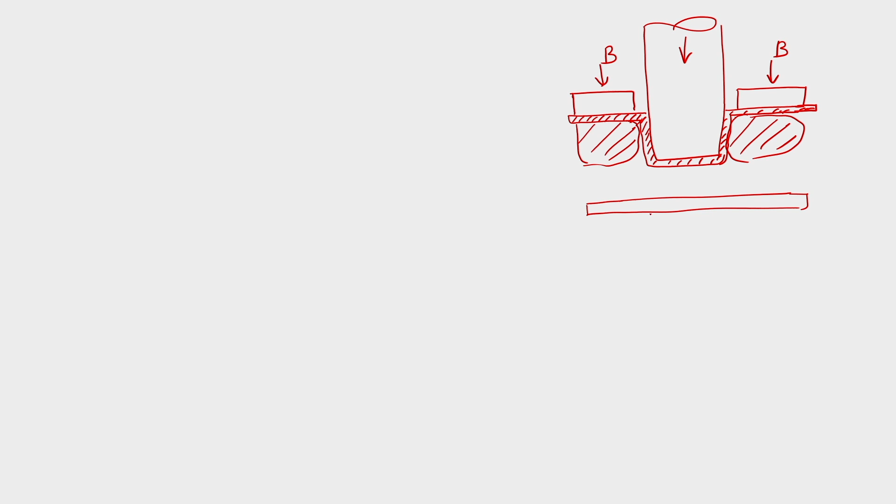These are the two things. We have this tension here, maybe this is T phi we can say. This is one part. At this initial part, the drawing of an annulus part towards the inside will be moving along this direction on both sides, and friction also comes into picture.

Whereas the second part is the stretching of the sheet over a circular path, the circumferential part around the punch. So these are the two things, and these two operations are connected to the cylindrical cup wall. The cup wall is not deforming, but it transmits the forces between both regions, the annular part drawing inwards and the stretching of the sheet over the circular path.

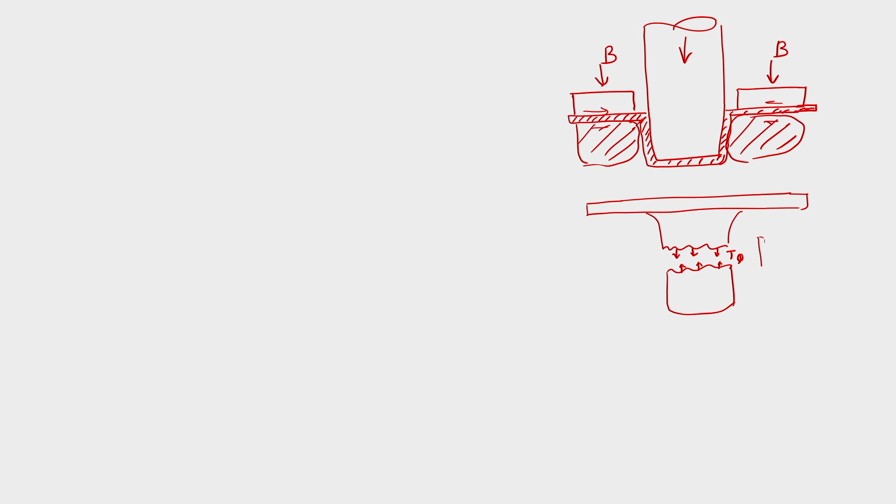If you consider the drawing of the flange part, where it is drawing inwards, we can say drawing of the flange. Consider that the flange part is circular, and we are only considering that part, where the flange radius is r0, the initial radius, and this is ri, the initial internal radius of the flange part. At any arbitrary point, we take r value.

If you look at these conditions, there are stresses present, inside stresses are also there. If you look at the flange of the shell, any part of that can be considered as an annulus part.

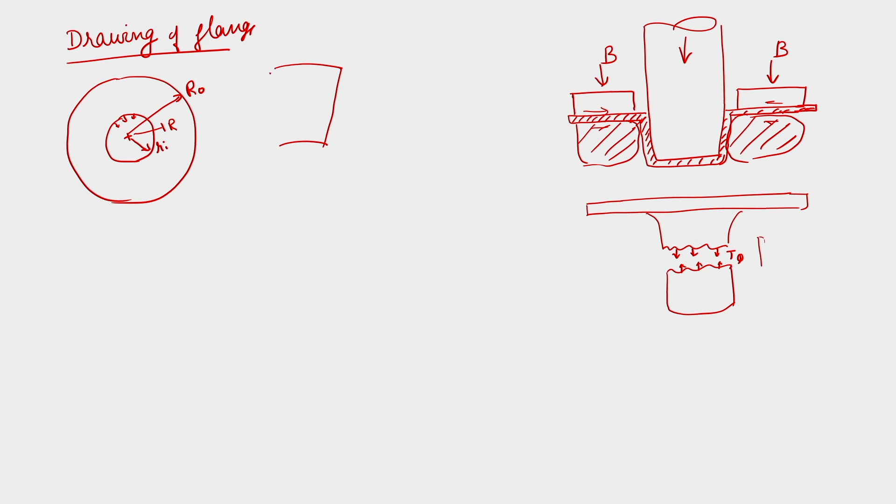The stress on the element of radius r, if you take an element on this flange part at radius r, you will find the stresses acting: sigma r plus d sigma r, the radial stresses, and towards this direction it is sigma r. Then you have the hoop stress, sigma theta, and this is your dr radius. This will be your r, and this will be your d theta.

This is the element, and if you look at the thickness, you will find it is T plus dt, and here you are getting T. These are the stresses on the element of radius which is taking place.

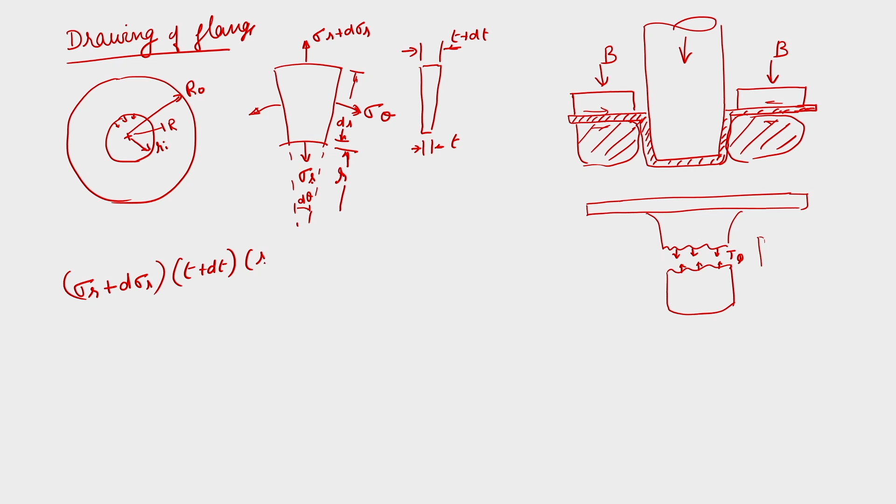The equilibrium equation when you write for this particular condition for this element: we write sigma r plus d sigma r, plus into t plus dt, into r plus dr, into d theta, is equal to sigma r t into r d theta plus sigma theta t dr d theta.

You expand and eliminate the higher order terms, and manipulating it mathematically, rearranging it, this reduces to the form: d sigma r by dr plus sigma r by r into dt by dr, minus sigma theta minus sigma r by r, is equal to 0, equation number 1. So it reduces into this differential equation.

Now when you look at this, if you take these 2-3 cases, say the radius along a line, you can find out what are the forces at A, at the extreme end of the flange, then at B, which is intermediate between the inner radius and the outer radius, and then at C.

At these points, if you look at the stresses, at the outer edge of the flange, since it is a free surface, your radial component of stress sigma r is equal to 0. So at the outer surface, the free surface at A, it is a uniaxial compression stress in which sigma theta is equal to the uniaxial flow stress of the material.

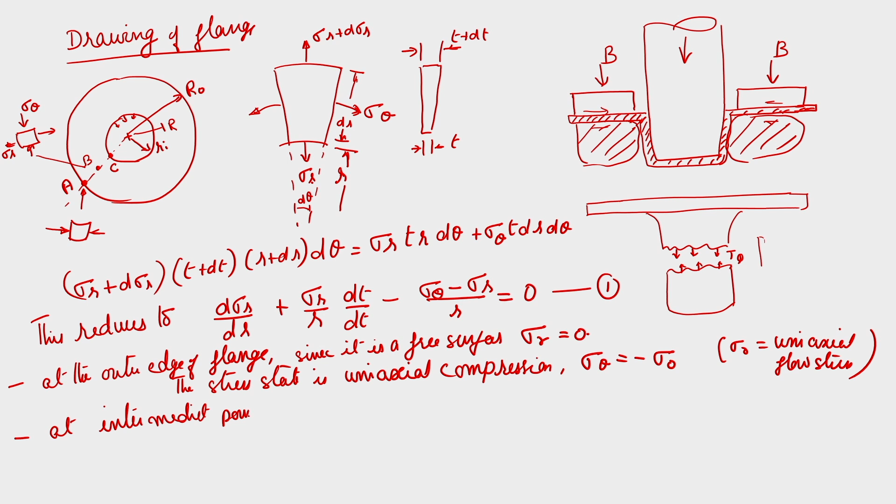So at this point, the situation is: sigma r is tensile, and sigma theta will be compressive in nature. So at B, at this intermediate point, you will see that sigma r is equal and opposite to the hoop stress sigma theta, where sigma theta is the hoop stress and sigma r is the radial stress.

And at the inner edge, that is point C, you will find that the radial stress is the maximum. So the radial stress keeps on increasing from the outer periphery to the inner radius Ri of this cup.

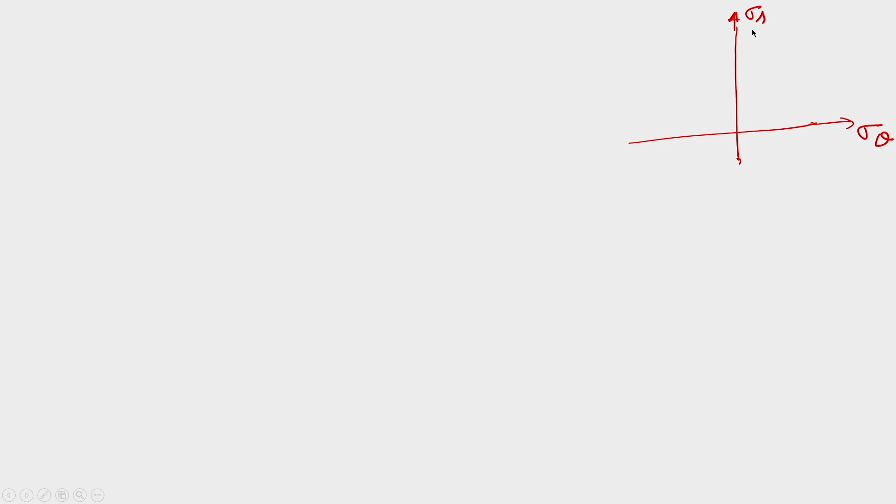Now if you look at the strain diagram at these three points, assuming Tresca criteria, it will be like this. Here you have sigma theta, and here the radial stress sigma r, that is sigma 1, sigma 2. Assume it is something like this, where this is point A, and the strain at point A is epsilon A, because when it is drawn inwards there is thickening taking place.

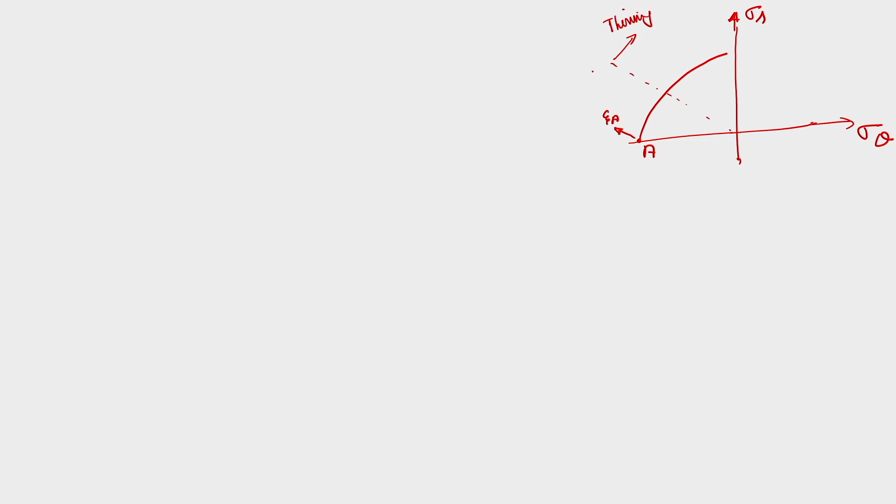If you look at this point where alpha is equal to -1 and beta is equal to -1, here it is thinning, if you refer to our earlier diagram, and this is thickening. So here you get point B, suppose at some intermediate point these two will be there. This is the condition, and here may be your epsilon B, and here it may be your epsilon C at some point, and maybe if you just take this as your sigma 0.

This is the instantaneous flow stress of the material. So this is your sigma C, epsilon C, not sigma C.

So at the outer edge, the blank will thicken as it deforms, because it is in this region. If you refer to our strain diagram discussed earlier, beyond this point towards the second quadrant, between region A to B, the material will be thickening, whereas from B to C, the material will be thinning. When it reaches C, there will be maximum thinning.

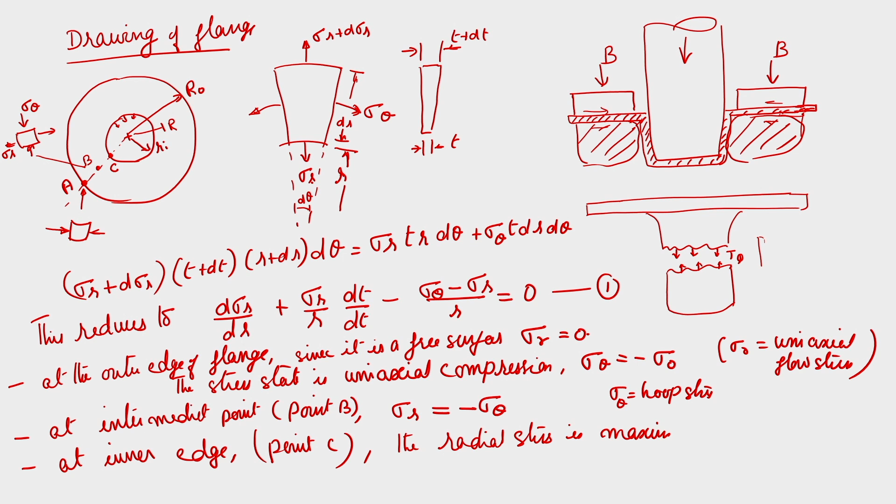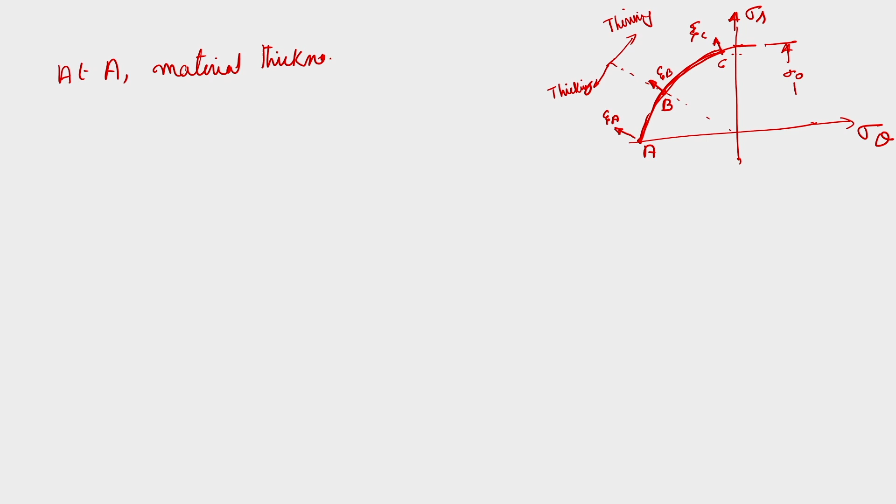So at point C, the inner edge, the sheet will thin down, and that will be the weakest point. The overall effect is that if it is thickening at one edge and thinning at the other, the overall area of the flange remains almost constant, which is a very good approximation. So, at A the material thickens, at B we can assume no variation in thickness.

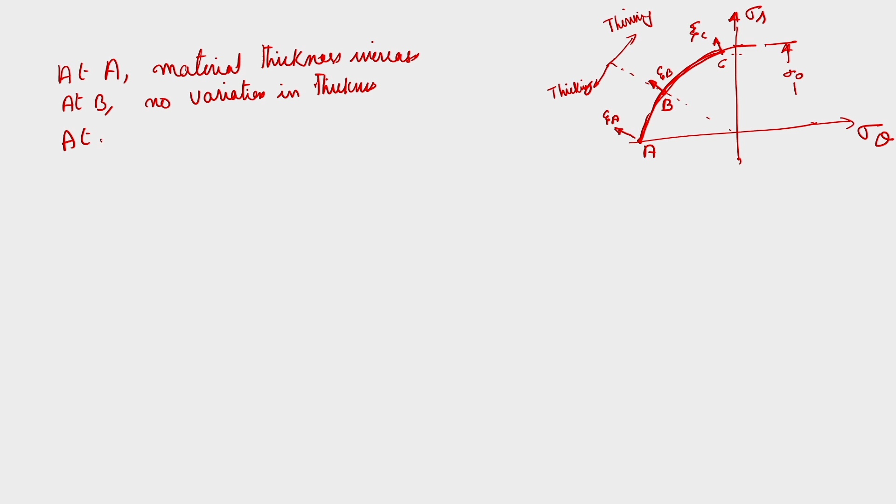At C, the material thins as it deforms during the deformation process. So the overall effect is that in drawing, the total area of the material initially in the flange region remains constant. So there is not much change.

That is a good approximation for arriving at some logical conclusion, or some good relationships. Now, if you consider the initial strain increment when the material is trying to deform and apply the Tresca criteria, you may have to do this by numerical methods, but if you just consider the initial case and final case, that will be much simpler. So let us consider the initial strain increment.

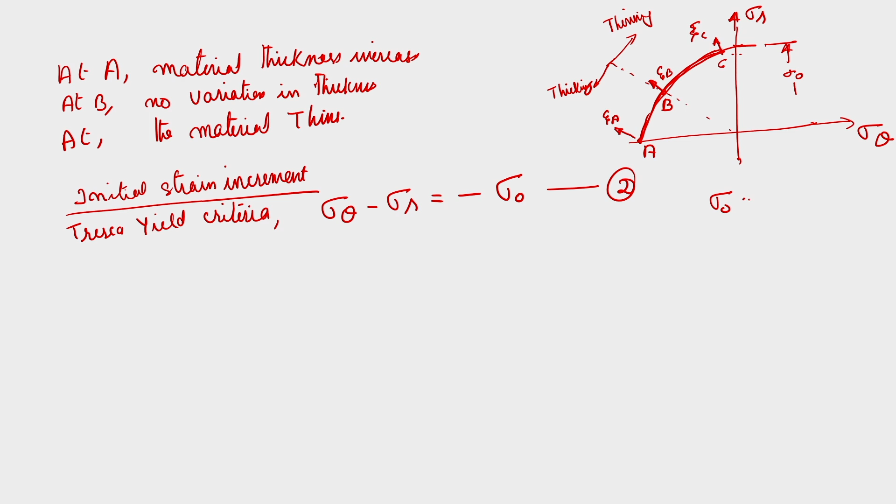So applying the Tresca yield criteria, sigma theta minus sigma r is equal to minus sigma 0, where sigma 0 is the uniaxial flow stress. Now, as the initial thickness is uniform, since the initial thickness of the blank T is equal to T0, this expression is sigma 1 minus sigma 2 equal to your yield stress. So that is the relationship which comes.

Now, if you integrate equation 1 applying these boundary conditions: at outside radius r0, your radial sigma r is equal to 0, and at the inner radius rI, your sigma r is equal to sigma rI. So if you integrate and apply these boundary conditions, you get this relationship for sigma rI.

I am not going into the detailed derivation, but you will get sigma rI equal to minus sigma 0 into log rI by r0, that is equation 1, and sigma theta I is equal to minus of sigma naught minus sigma rI. This you can get as equation 3.

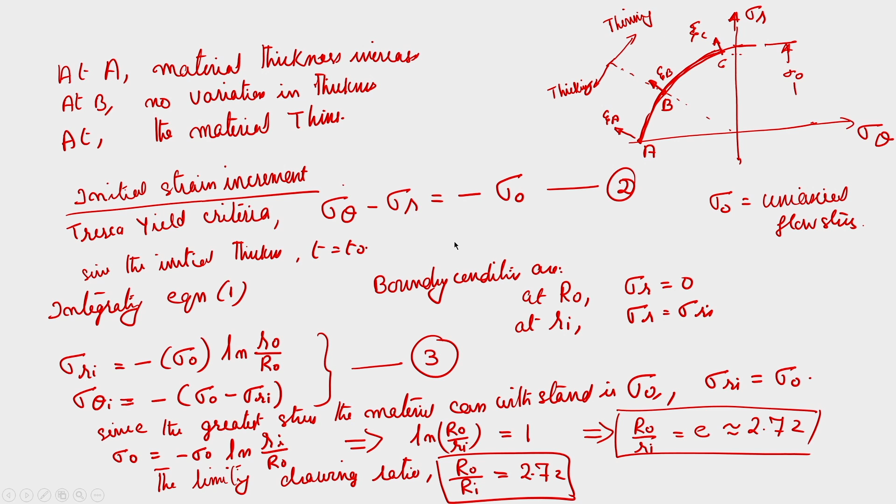But the thing is that this is an overestimate. You may not get that much of a drawing ratio in the actual case. There are various reasons for this. One is the effect of strain hardening.

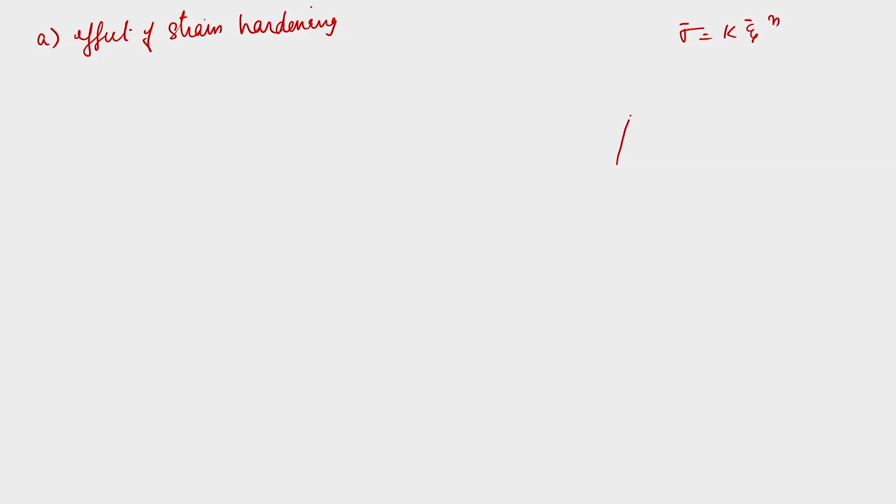As the material is drawn inwards, plastic deformation takes place, and the stress necessary to draw the flange keeps on increasing, because with more and more strain happening, say sigma is equal to k epsilon raised to n, the stress will keep on increasing. So with deformation, the stress necessary for drawing keeps increasing. During the drawing of the flange, the outside radius decreases at any instant. So if you look at this case, if this is the thickness.

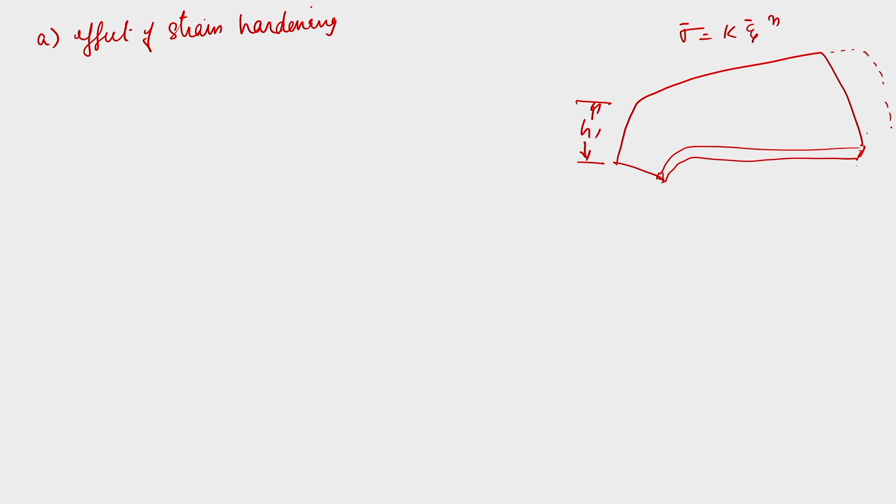Okay, so let us say that this is H1, and initially this was R naught. Now it is R, any intermediate point R. And you will find that here the stresses are acting, that is sigma R I, and this is your R I. So if you consider this at any instant, from R0 it has come to R.

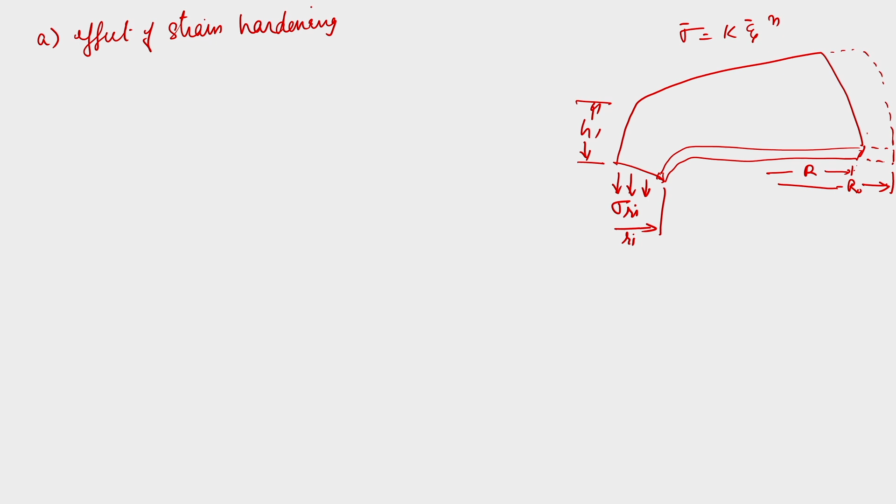So the material has been drawn inside. When the material has been drawn inside, it work hardens, and due to that the stress necessary for deformation will keep on increasing. So that is continuously varying, but for most deformation studies we assume for simplicity that we can take an average stress, flow stress, like average flow stress.

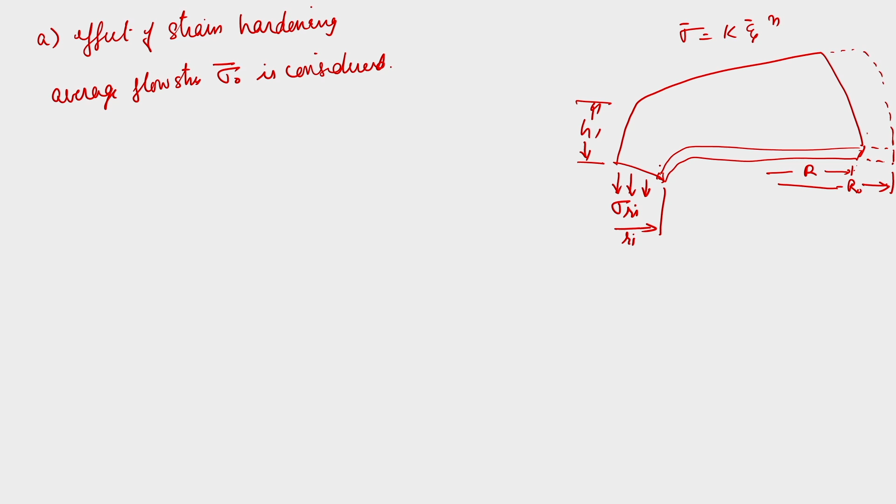Sigma naught is considered for simplicity. So over the whole flange, as this deformation is taking place, we found that at the outer extreme edge, as the metal is drawn inwards, thickness will keep on increasing, whereas at this inside radius it keeps on thinning. But we also assume that more or less the area volume of the material is going to remain the same.

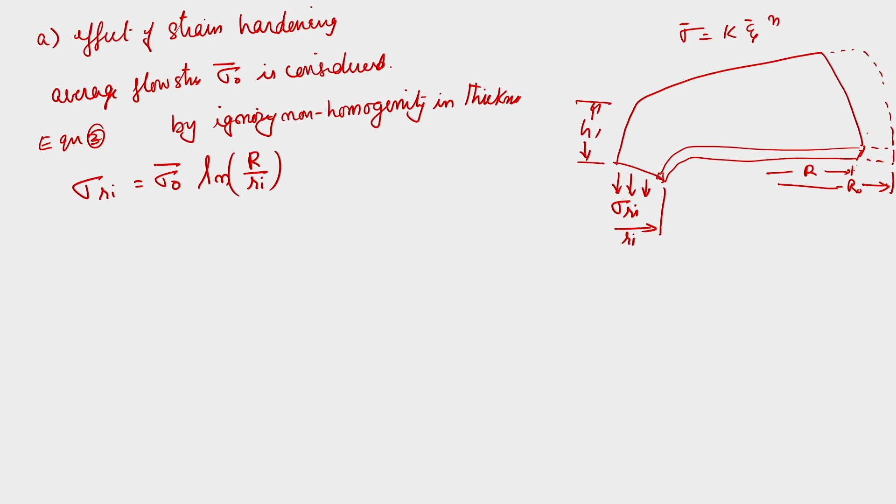So we can assume that for our analysis, if the non-homogeneity in the thickness is ignored, then equation 3 — that means by ignoring non-homogeneity in thickness — we can write this equation 3 as sigma R I is equal to sigma naught bar into log of R at any instant by R I. We can write this. So it keeps on changing with R.

And then if you just plot that value of R I versus H, the thickness at which it has been drawn, sigma R I, you will find that it gradually increases, reaches a maximum value, and then suddenly it decreases to 0.

In determining the draw stress, you will find that there are two opposing factors which are coming. One is that as R becomes smaller and smaller, the stress reduces. As per this equation, the stress necessary reduces. But on the other side, the opposite is happening, that is the increasing stress due to strain hardening. So these are two opposing trends.

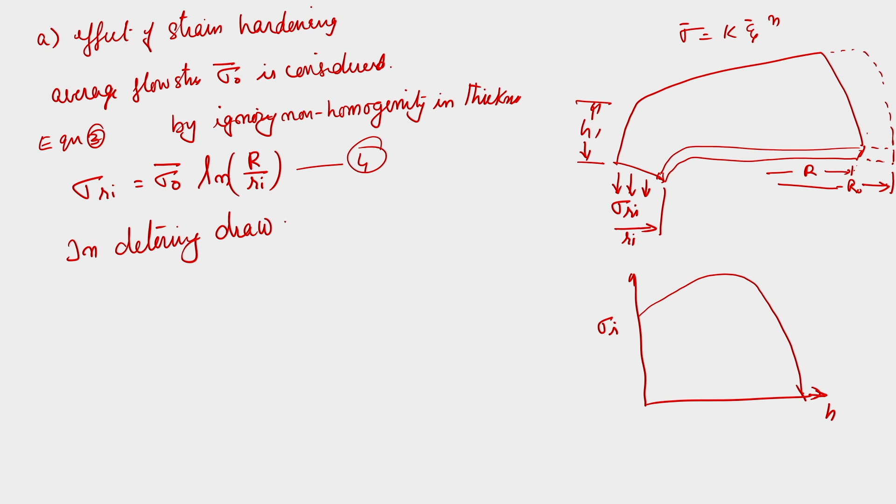So in determining draw stress, the two opposing factors are: one, as R reduces, the stress necessary reduces. Then, as R reduces, strain hardening increases the stress necessary for deformation.

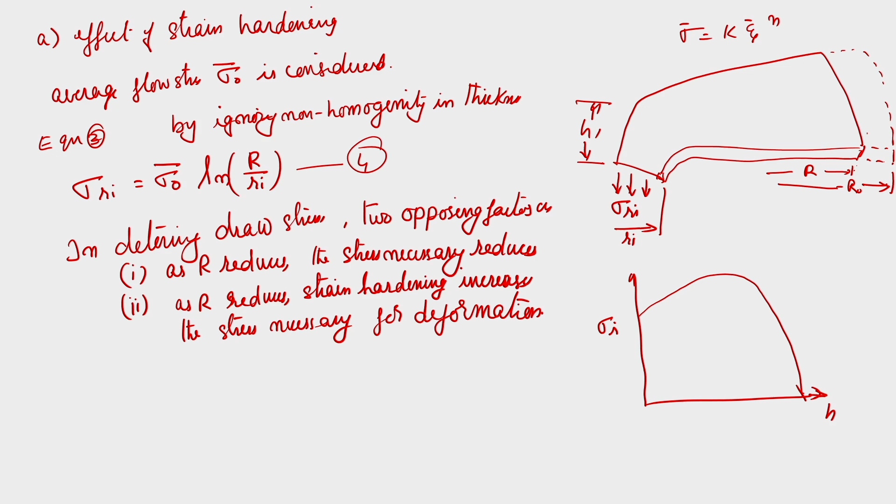And you will find that these two conditions are there, so these opposing or competing factors are happening. So it will initially increase to a maximum value and then it further decreases. Now, the thing is that though we mentioned the drawing limit is there, and it is whatever we have assumed as 2.72, it is mainly due to these factors which are coming.

One is we have ignored the effect of friction. So in the stamping analysis, say B, the effect of friction. First one we consider is strain hardening, second is the effect of friction which is taking place. So in your stamping analysis, due to sliding around a radius, when it is drawing, sliding around a radius, we arrived at dt1 by t1 is equal to mu d theta. If you refer back to that, you will find that.

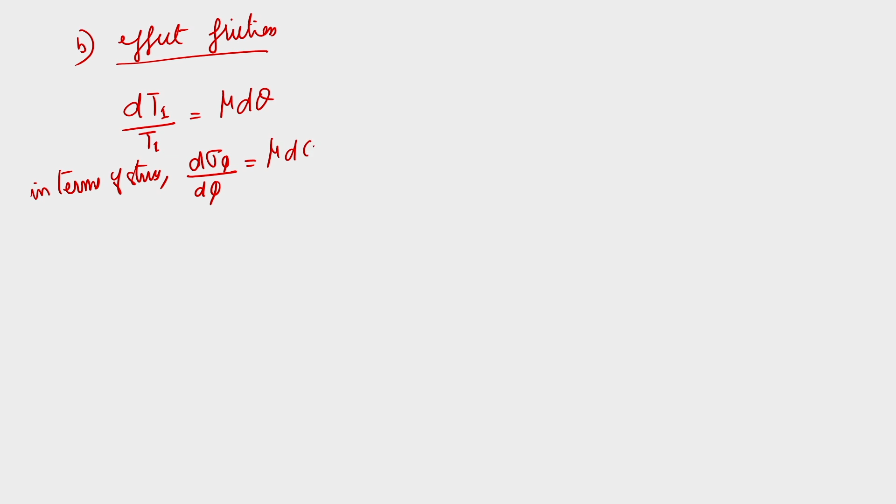So this can be written in terms of the stress, that means in terms of stress, we can say d sigma phi by d phi is equal to mu d phi. So we can write this.

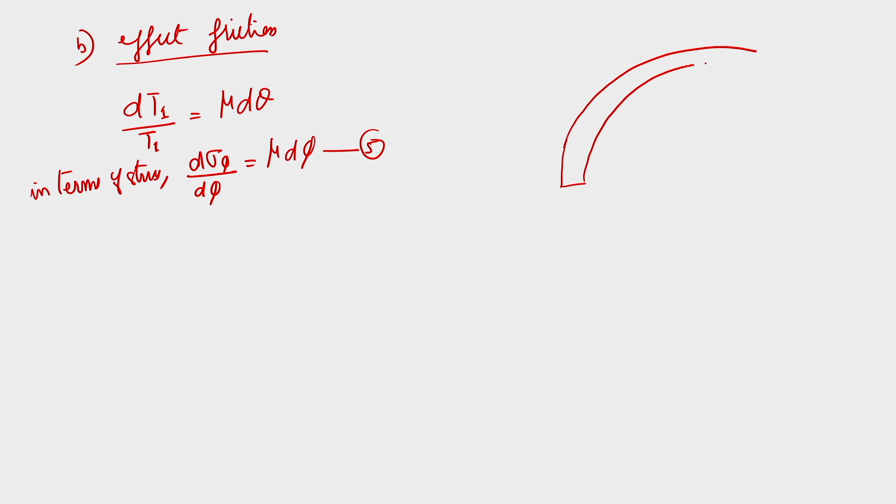And if you just look at what is happening when it is moving around the die, it will be coming like this with a thickness. So here you will find that sigma R I is there, here you will find that sigma phi is there. The material, when you are drawing, it will be moving around this, your die is there. So this is R D, radius of the die. Considering this, at the die radius, if you integrate it, we get this equation: sigma phi is equal to sigma R I exponential of mu into pi by 2.

Okay, so this is what we will be getting. You will find that the friction between the blank holder and the flange will increase the drawing stress. It is a reasonable approximation that the blank holder force B will be distributed around the edge of the flange, completely, as a line force.

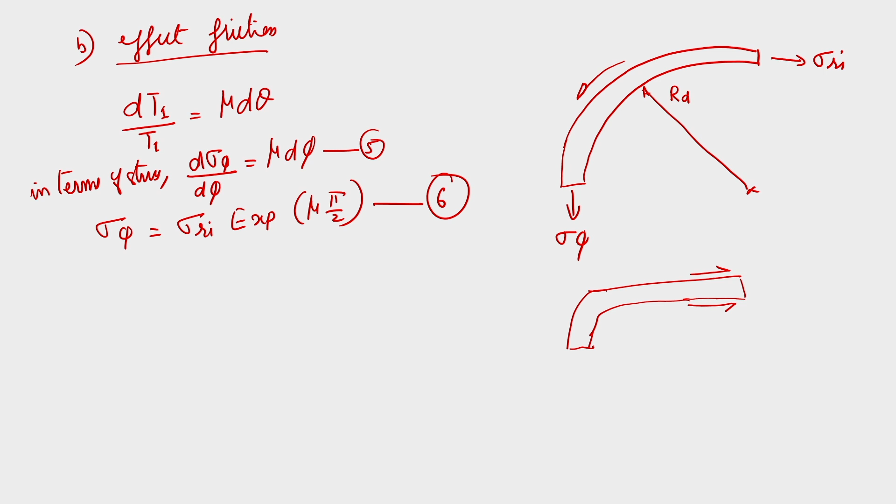If you look below the flange, this will be like this. So we can say here your frictional forces are there. The normal force which is going to act, we can consider as a line force of magnitude B by 2 pi r naught, because the total force B, and because it is thickening at the edge only, it will be in contact at the edge. So whatever force is there, it is like a line force on the periphery.

So it is B by 2 pi r naught, the line force which is coming, per unit length. So that means the line force per unit length is equal to B by 2 pi r naught, where B is equal to the blank holder force.

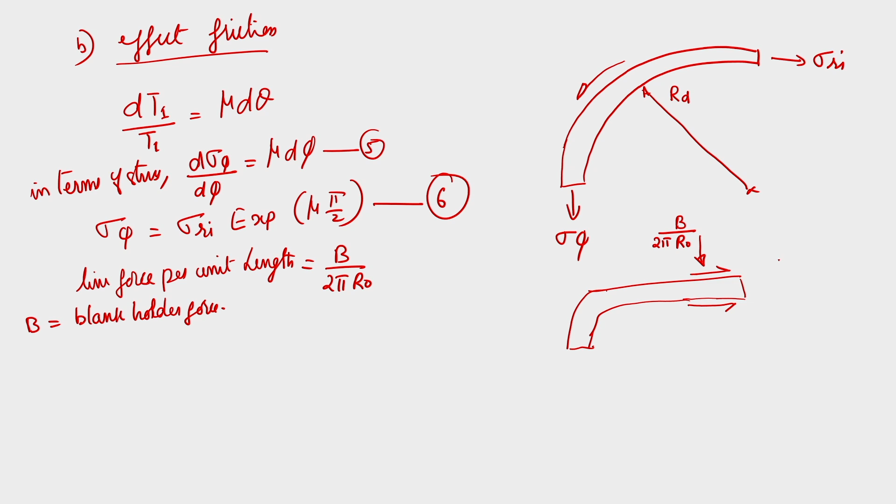Now, when you look at this, there is a friction which is coming into picture. So at both the sides, if you look at it, this will be equal to mu B by 2 pi r naught, because 2 mu B and this is coming into picture. So we can assume that, if you consider the edge of this flange, this will be a line of sigma equal to mu B by pi r naught t, where t is your thickness.

So this is the flange part. This can be expressed as a stress acting on the edge of the flange. That means the stress in this direction, because it is a line force, the stress acting on the edge of the flange, sigma r at r equal to r naught, is equal to 2 mu B by 2 pi r naught t, so that is equal to mu B by pi r naught t. Here B is your blank holder force, t is the thickness, and r naught is the initial radius of the material.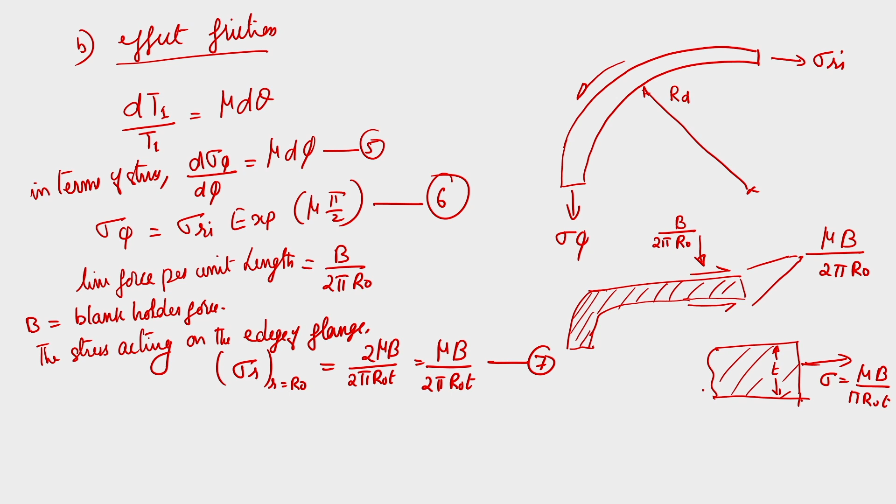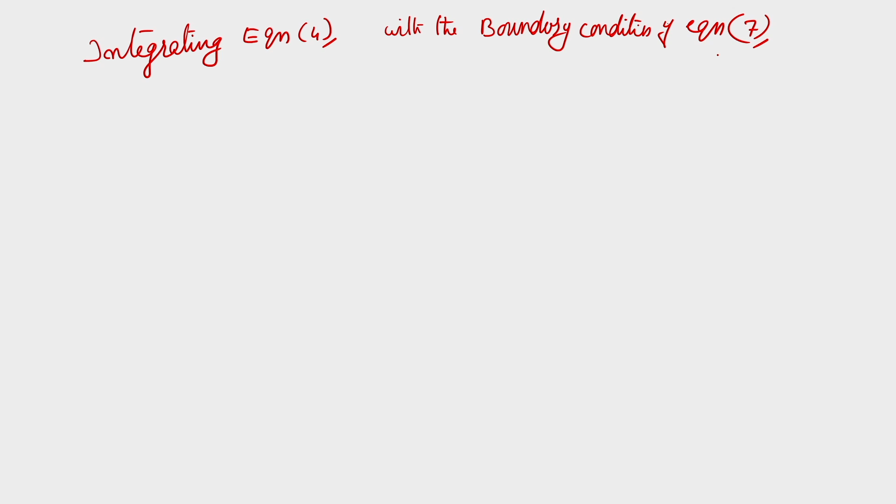So both A and B, the effect of friction as well as the earlier case of work hardening, will increase the stress required to draw the flange. So integrating equation 4, with the boundary condition of equation 7, we can write the expression for the drawing stress, using the average flow stress, as sigma naught bar log r naught by r I plus mu B by pi r naught t.

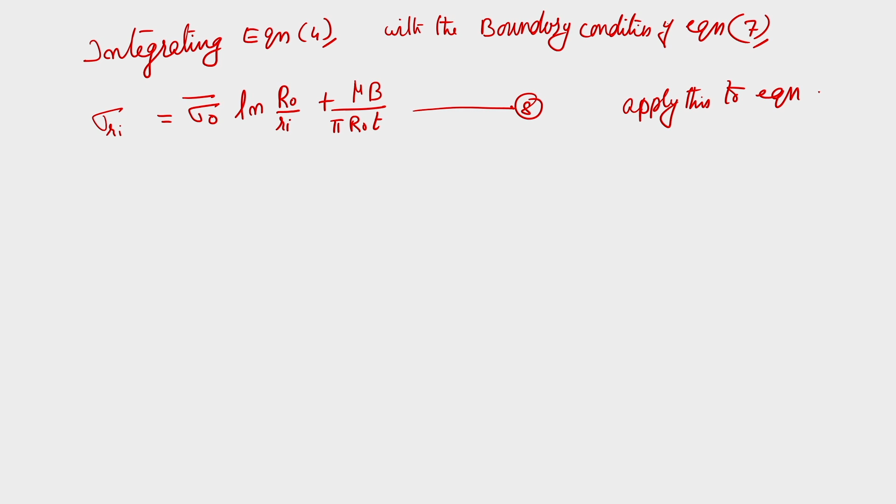And if you apply this to equation 7 and equation 6, we will get the side wall stress. Sigma phi is equal to, we can finally express it as sigma naught bar log r naught by r I plus mu B by pi r naught t, into exponential mu pi by 2,

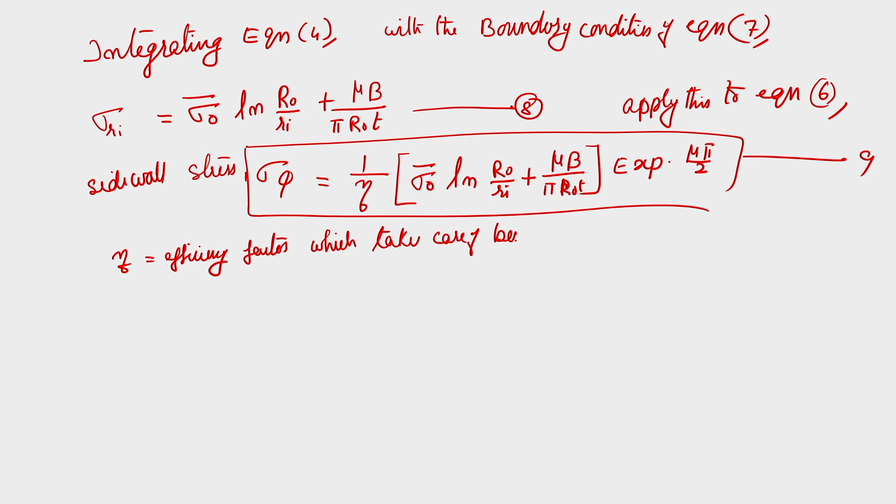where this is an efficiency factor which takes care of bending and unbending. Due to that, some work hardening will take place, but at the same time friction also will come in over the die. So that is what we are going to get.

Now there are some cases where we can discuss wall ironing, because after deep drawing you may apply an ironing process on the cup, so that its thickness gets reduced, and then you get a very uniform thickness with good surface quality also. So that process is called ironing — wall ironing of deep drawn cups. If you look into that, this is a process, but let me explain it.

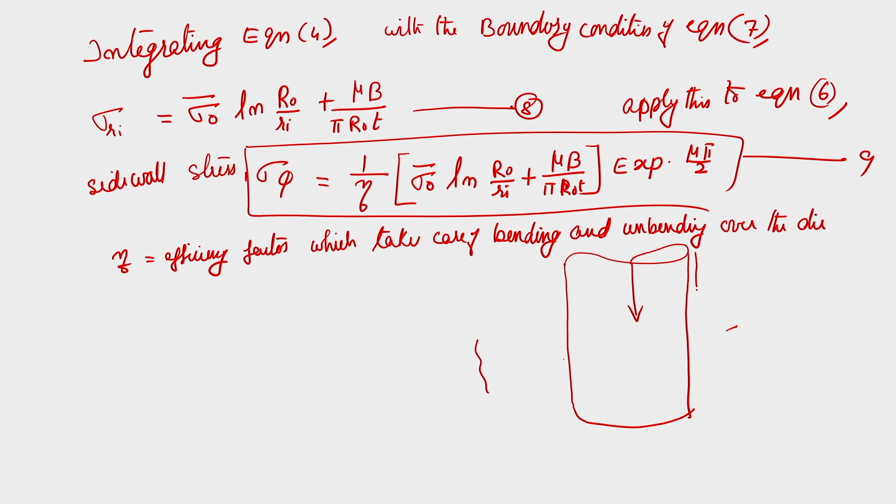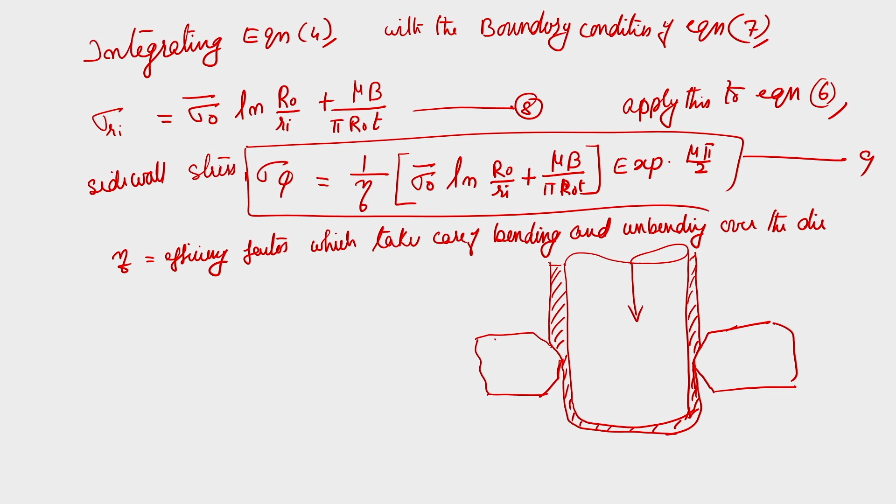See, suppose this was the material, and by ironing you found that the thickness has reduced. We have to assume that this is uniform thickness, so I can draw only up to this way. Here you have a die like this — this is the ironing die. If you really look at this part, the forces will be like this, with a normal force Q acting here.

So, these two will be different, because the frictional force at the punch-workpiece material and the die-workpiece material will be different. So, this thickness we can say is T2, and the initial thickness, let us say it is T1. So, these are the forces which are going to come into picture.

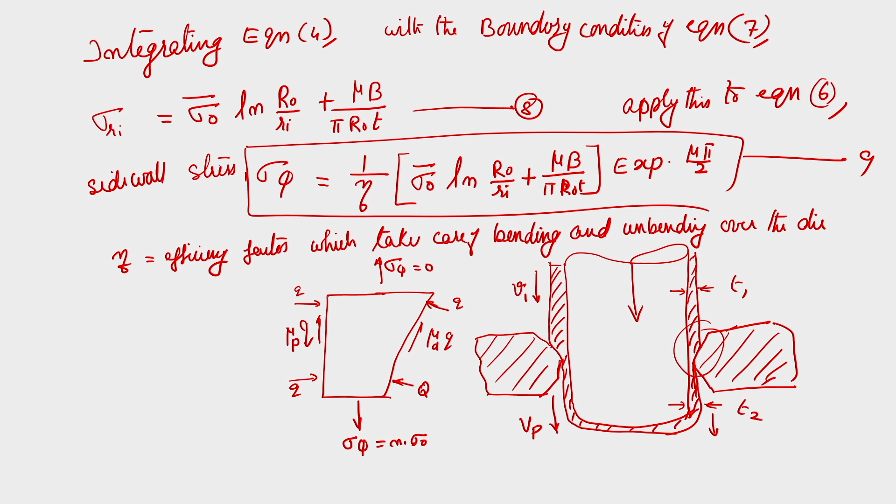So, you will find that when the punch moves down, it moves down with the velocity of the punch, that is Vp. Whereas, it may not be the same here, the material may not be moving with the same velocity. So, V1 at the initial stage will not be the same as the output velocity. Output velocity will remain constant as the punch velocity, but here it will be different, it will be less than that. So, as the punch must remain in contact with the base of the cup, velocity of the material as it exits the die is Vp.

Velocity of the material as it exits the die is equal to Vp, and so that is equal to the punch velocity, we can say punch velocity.

But during the ironing there is no change in the volume, volume remains constant, but the thickness at the end is lower. The thickness T1 is greater than thickness T2. So, the rate at which the material enters into the deformation zone should be the same as the rate at which it leaves the die.

So, for that case, what happens is that because the velocity of the material at the exit of the die is Vp, the velocity at the inlet to the deformation zone will be lower than Vp.

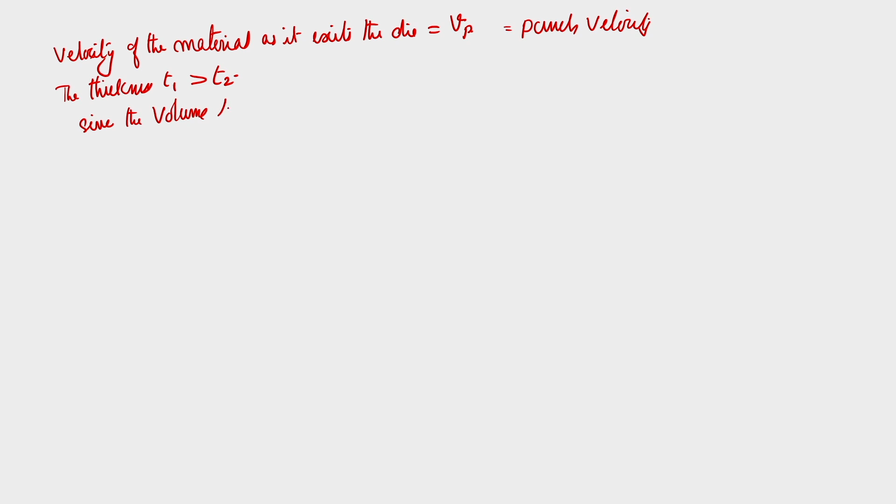Okay, so hence, we can say that since the volume rate of metal which enters into the deformation zone is equal to that which exits the die.

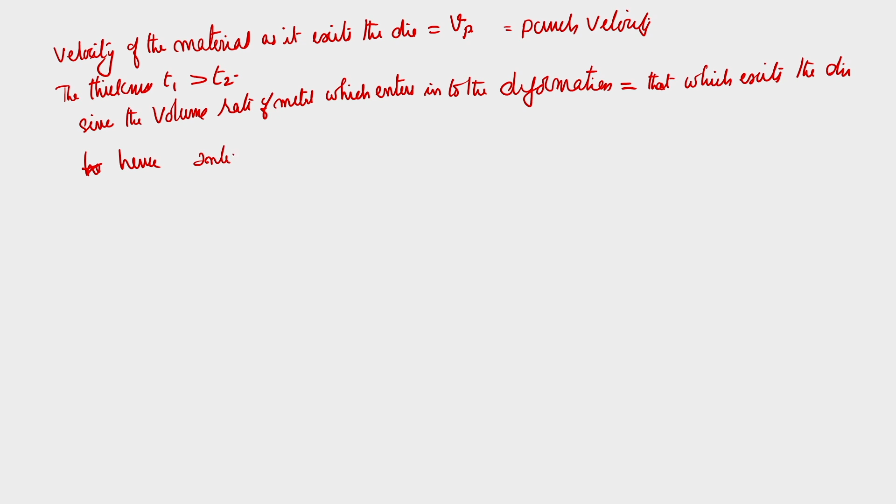Hence, the V-inlet velocity of material, V-I, will be less than V-P.

Okay, so since the constant volume relationship is maintained, you can write this equation: 2 pi R-I T-I into V-I is equal to 2 pi R-I into T2, this is T1 V1, we can say T2 VP. So from this we will find that V1 is equal to VP into T2 by T1.

So, now the punch is moving down faster than the incoming material, and the friction force between the punch and the material is downward. So, that is one case. The punch is moving down and the friction force is also there, so it will be moving down at the punch-material interface. But if you look at the frictional force at the die and the material, it will be upward, in the opposite direction, because more material is coming and filling up that area.

So, it will always have a backward flow of material, and due to that your frictional force will be in the opposite direction. Initially the friction at the punch and the material, basically at this region, that is equal to mu-p. Since mu-p is downward, it will be assisting the deformation process. Whereas at the die interface, this friction, mu-d, will be moving upward, not downward, so that will be opposing the deformation process.

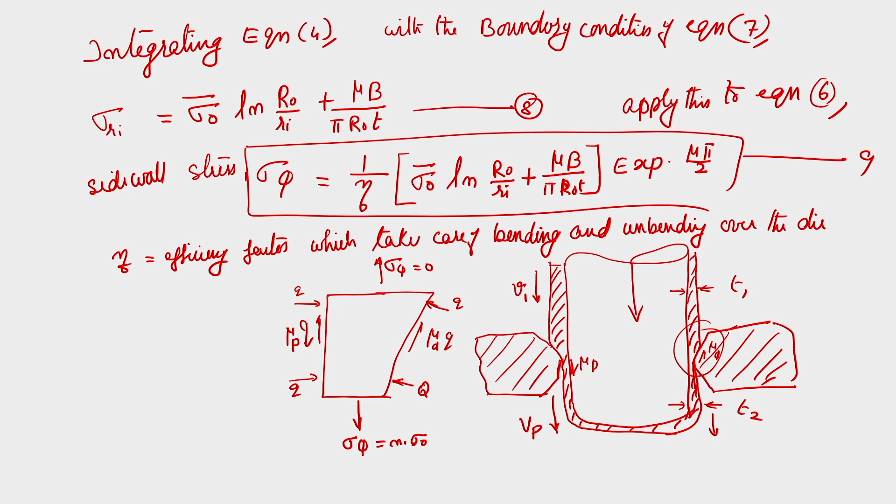So, for this case, because mu-p, the frictional force at the punch-metal interface, is assisting the deformation process, if you have a higher frictional force, it will be very useful. So many times people increase the surface roughness of the punch surface, but of course you cannot increase it too much, because you may face problems removing it. Whereas at the die-material interface, your friction should be less. For that, people may add large amounts of lubricant at the surface, so that resistance is reduced. So, it is advantageous to have high punch side friction, mu-p.

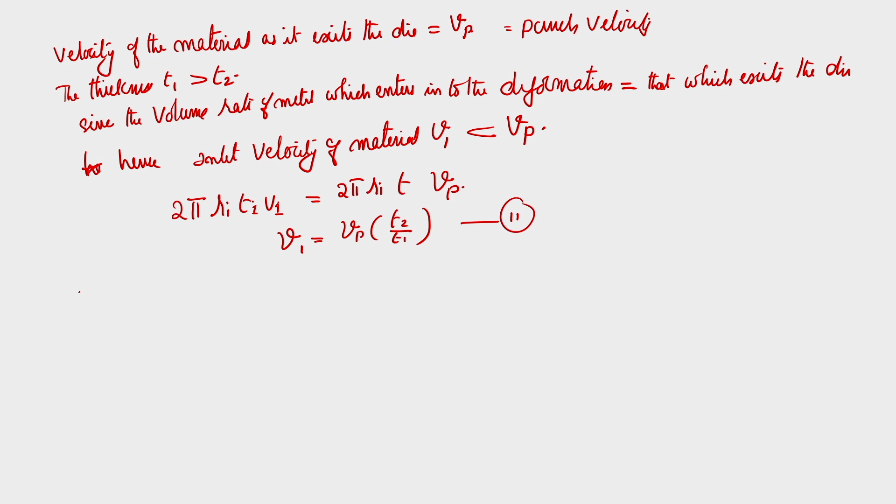Now, if you assume that the material behaves in a certain way, assuming the material, your blank, is rigid, perfectly plastic.

Rigid perfectly plastic means that sigma f is equal to your yield strength sigma y naught, the uniaxial yield strength. It remains a constant, and no work hardening occurs if it is there.

And if you apply the Tresca yield criteria, and consider the through thickness stress at entry where axial stress is equal to 0, you can write that Q is equal to minus sigma t, which is equal to sigma 0.

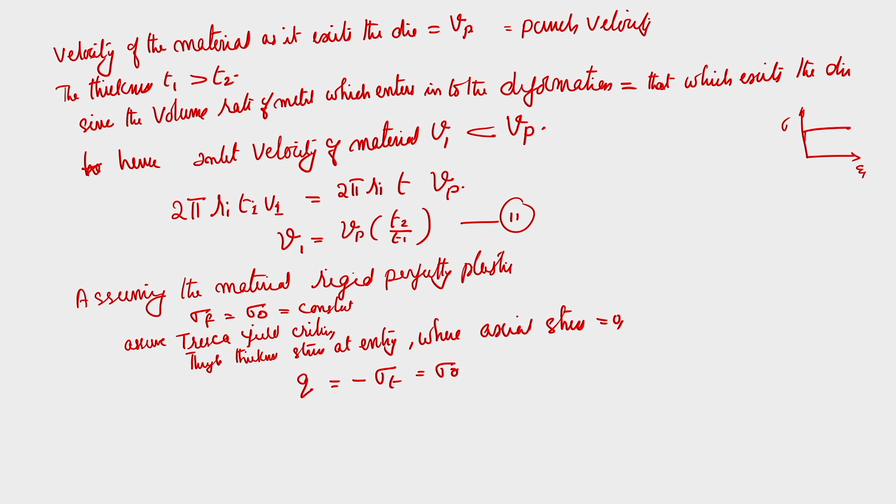So that means at the exit the axial stress is less than sigma 0 to ensure deformation occurs only inside the die. As shown in the figure, you can also come out with certain cases for the axial stress. Let's draw this figure.

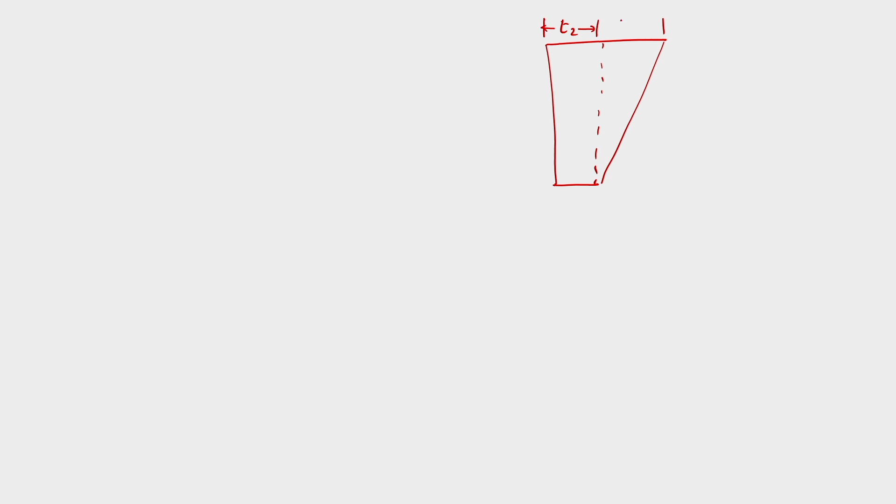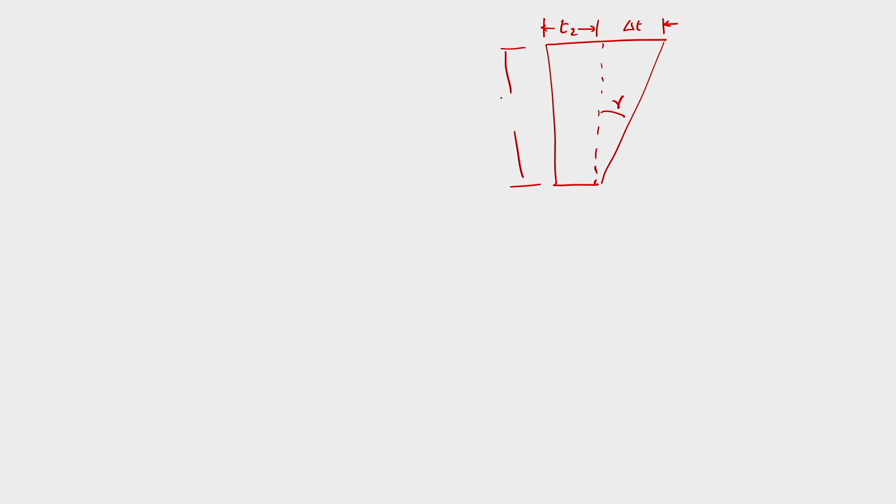So this is T1, this is T2, and this is delta T, the change in thickness. You will see that this is gamma, and the forces which are acting, you can also write this dimension as delta T by tan gamma, or if you take delta T by sin gamma.

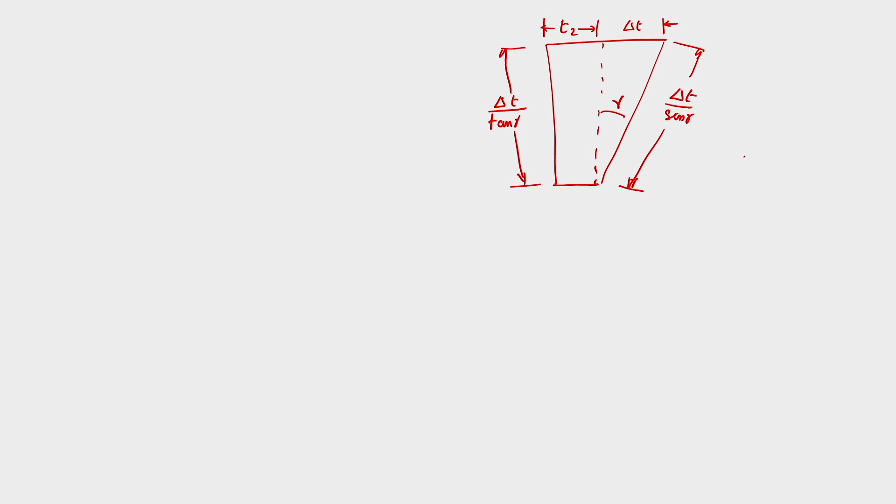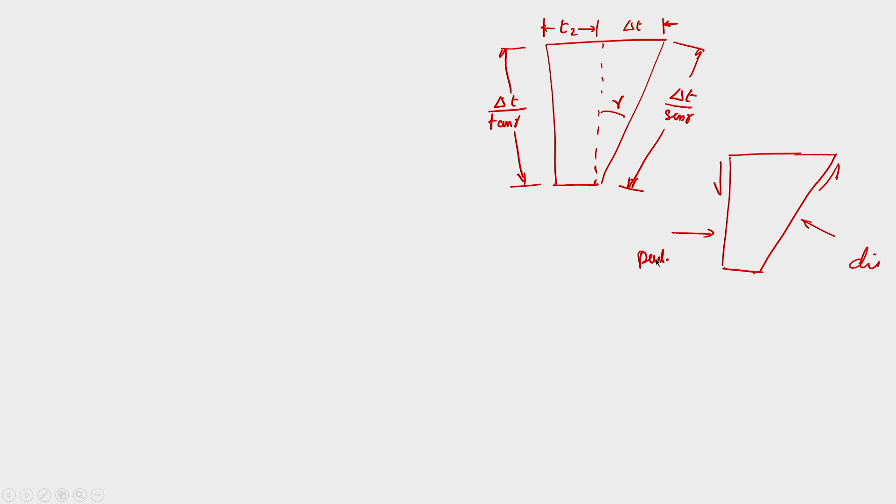Now if you look at the forces acting on this element, you have the frictional force here and the normal force here. Similarly, you have this normal force here and the frictional force here. This is the die side, and here it is the punch side. At the top it is 0, whereas at the bottom you will see m into sigma naught into T2.

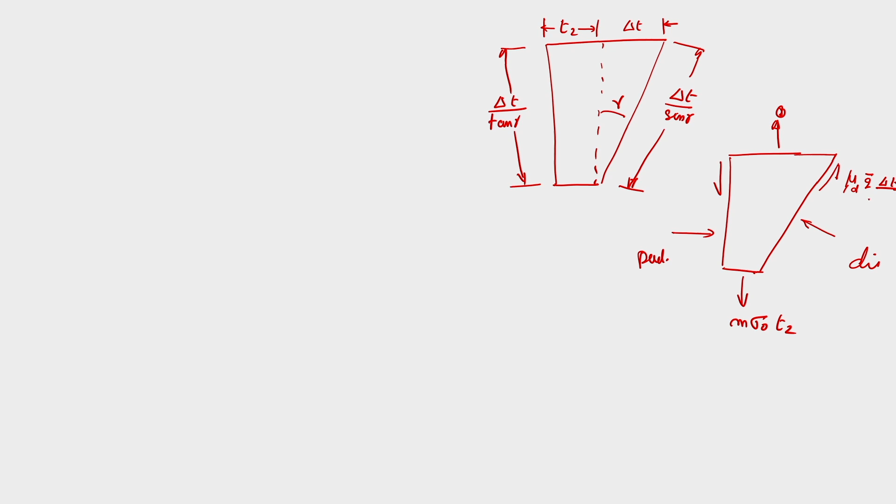Similarly here you will find the shear stress is mu d, where the frictional stress at the die-metal interface into q bar into delta T by sin gamma, and here it is equal to mu p into q bar into delta T by tan gamma. Here you will find this is the punch side.

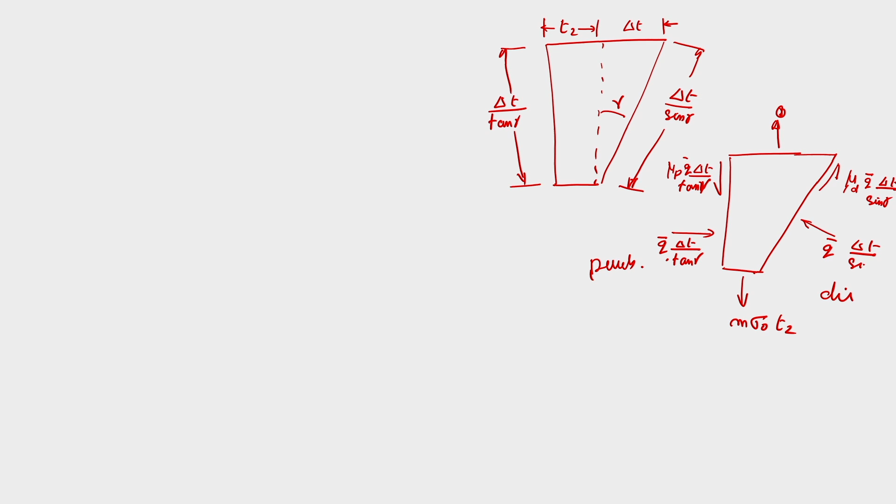So here q bar, the average flow stress, is basically equal to delta T by tan gamma on the punch side, and here it is equal to q bar into delta T by sin gamma. So you will find that q is equal to minus sigma T, which is equal to sigma 0.

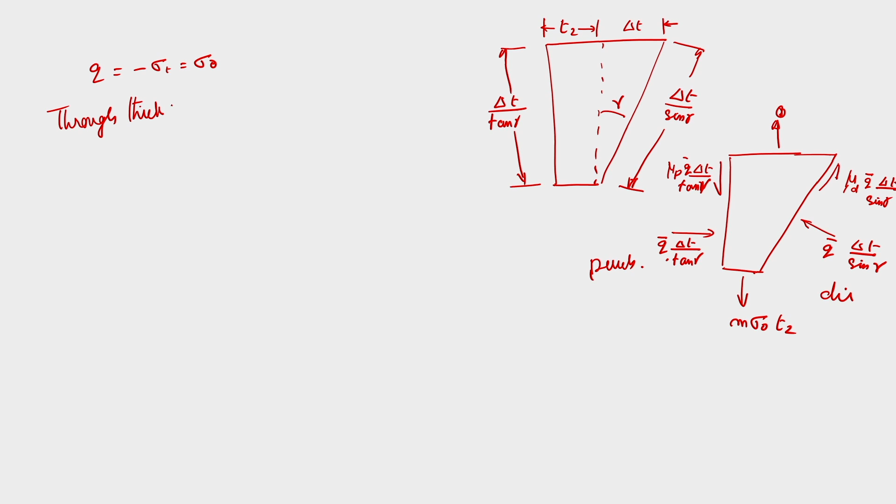So if you assume that the through thickness stress sigma T is equal to sigma 0 minus m sigma 0, because the axial stress sigma phi is equal to m sigma 0, where m is less than 1.

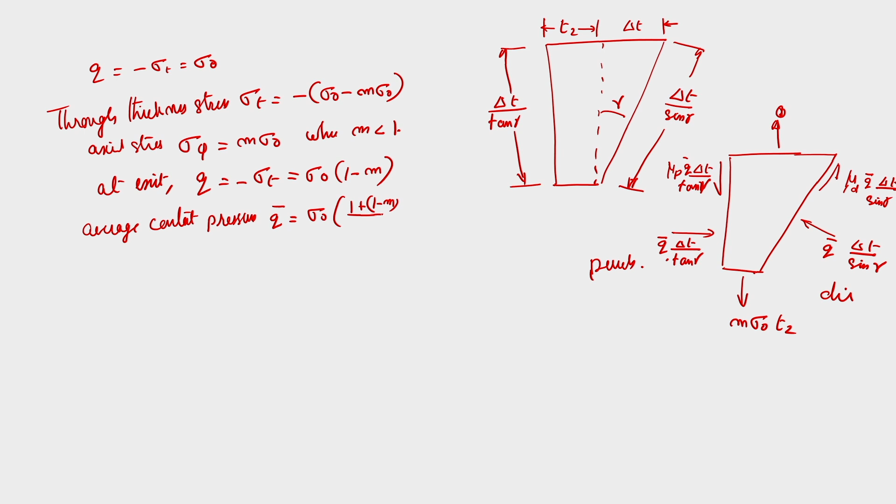So at the exit you will find that q is equal to minus sigma T, that is equal to sigma 0 into 1 minus m. So the average contact pressure q bar is equal to sigma 0 into 1 plus 1 minus m, divided by 2, which is equal to sigma 0 into 1 minus m by 2.

Now if you take the equilibrium of forces in the vertical direction on this element, it is equal to m into sigma 0 T2 plus mu p into q bar into delta t by tan gamma, is equal to mu d q bar delta t by sin gamma into cos gamma, plus q bar into delta t by sin gamma into cos gamma.

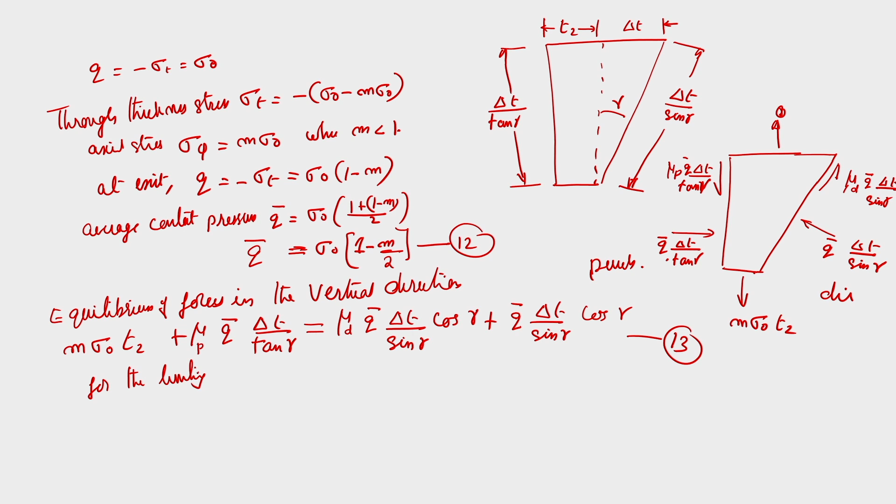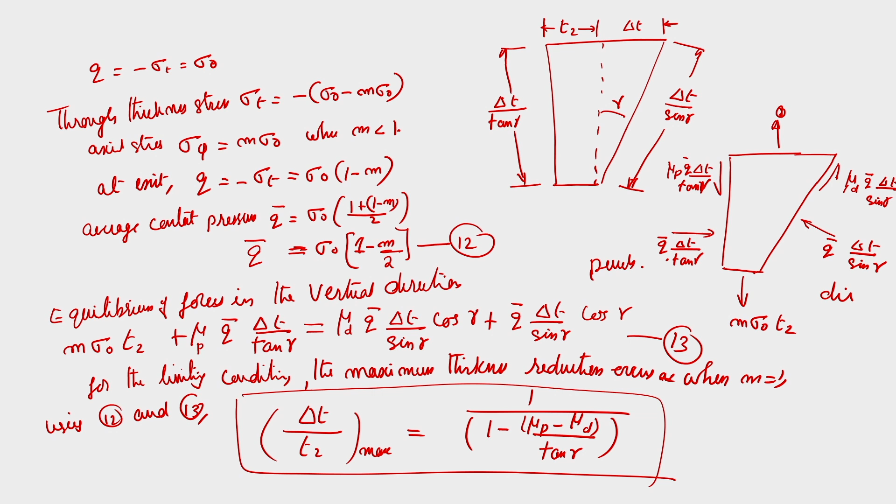So you can do this by considering the surface quality, the surface phenomena of the punch and the die, so that your friction can be changed accordingly, and then you can have the maximum reduction based on this mu p and mu d, and the die angle at which it is taken, you can find it out. So that is the limiting condition for maximum thickness reduction, and that way you can get it.